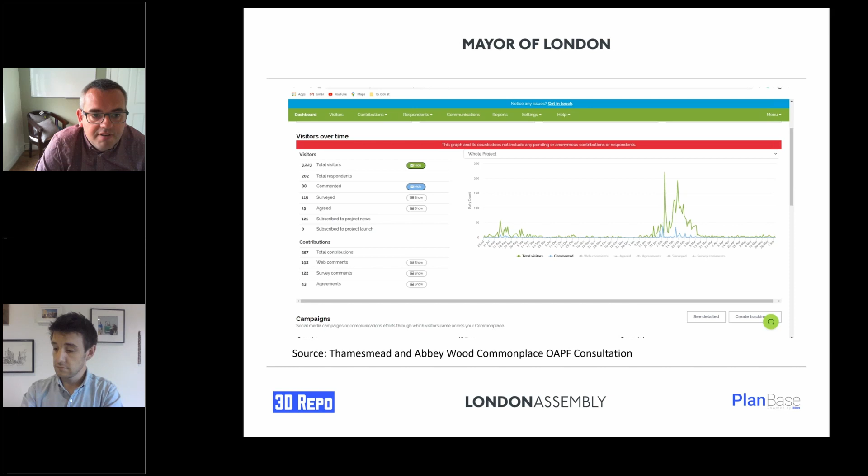Okay, so on to what 3D Repo is bringing to the table and what our goal was with this new kind of visual consultation. We wanted a new way to communicate the built environment and the community to the public. We felt that by displaying the proposals in 3D, we can help people get much needed context that they couldn't get in 2D drawings, as Peter mentioned earlier.

We also saw that consultations evolve from early stages through to final planning proposals, and they don't necessarily follow a linear A, B, C release path, and that maybe a digital platform could help release information and change things in the consultation and evolve it as it's going.

We wanted to complement existing remote, so web-based applications like Peter mentioned before, and also face-to-face tools and processes. We're not looking to completely wipe out other aspects of this existing process. We just want to slot in useful ways and embed ourselves into existing workflows. Of course, we want inclusive engagement, increased participation, and contextualized user feedback.

So it's not just that we want more. One of the problems with data is the more you get, the more you have to then deal with. So it's how do we contextualize that feedback so that the people making the decisions can really see what the public and the community think about the plans.

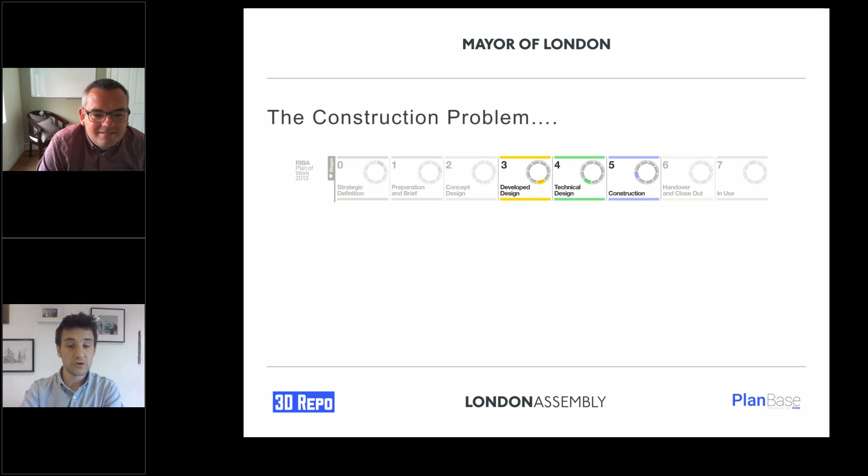So onto the construction problem. 3D Repo tends to exist in the RIBA stages 3 to 5 areas, so developed design through to construction. The reason we're there is because we've seen this rise of 3D models, often referred to as BIM, in construction, because the process of building has evolved beyond 2D drawings. Also the businesses involved in that construction process have evolved beyond just handling documents, and instead they're starting to handle large sets of data.

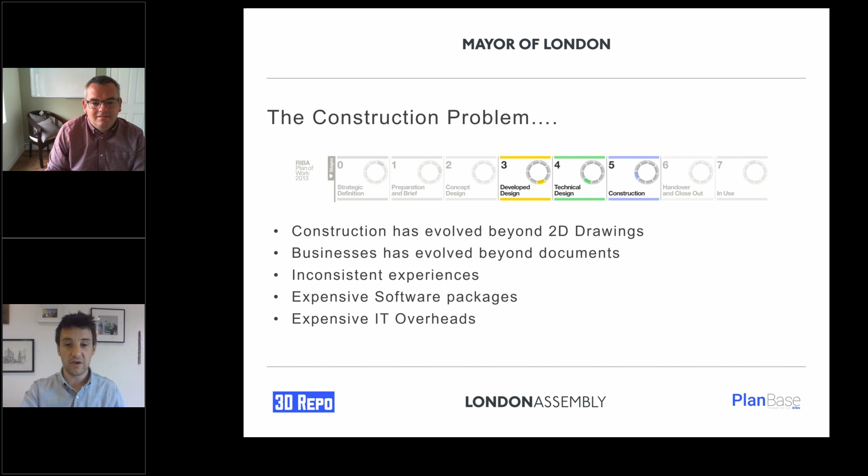And that was great, the 3D models helped solve that problem, but actually they brought with them other problems, which was multiple different softwares, file formats, and basically a frustrating experience for those that were involved in 3D models. And they had to use expensive software packages, and there was increased IT overheads.

So I want to dive into what exactly 3D Repo is and how it works, because I think that's going to contextualize what we've managed to do with Planbase in such a short period of time. First of all, 3D Repo is a 3D cloud collaboration platform. And what that means is it's a website that can display 3D models, in essence.

So you can send your colleague a hyperlink, and they can open up a 3D model, and you have confidence that what you sent them is what they're going to see. And the great thing is that if you create a new version of the model, all the people in your network will then see the latest version without having to go to your document management system and download the latest one.

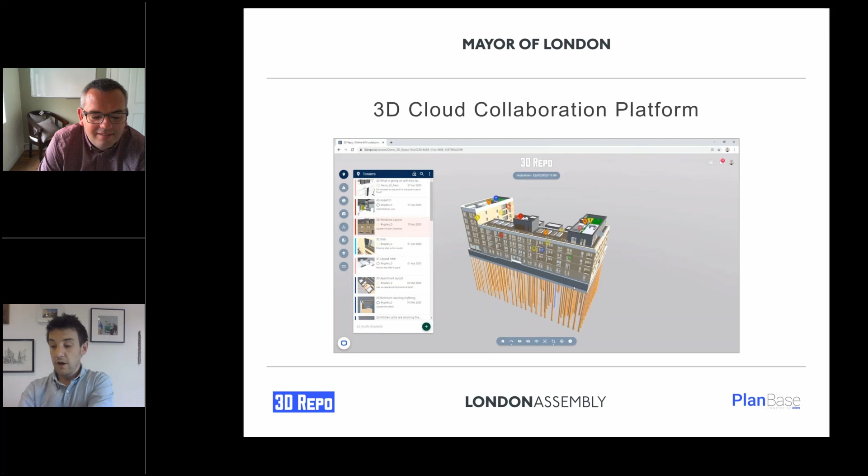Then from there, we started to think, okay, we've got this model management view, then what do we want to do with it? We want to start soliciting feedback from people in the industry and on the project. So people can look at models, architects can upload models, structural engineers can upload models, and they can start to see if they clash together, if they're going to have issues with construction. Schedulers can start to build what we call 4D animations of the construction process, so people could start to understand where their work fits in with the larger picture and if there's going to be any issues with logistics and things like that.

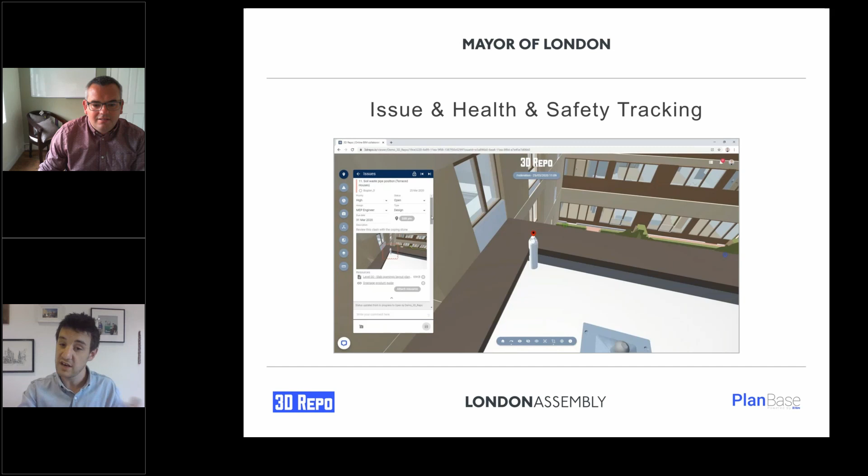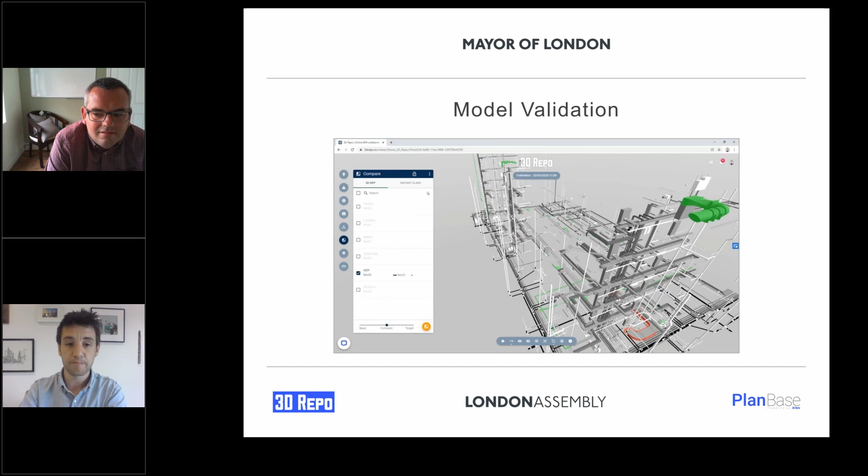So the back end of 3D Repo is a fully open source platform. What that means is we basically put our source code up on the internet for anyone to interrogate. That means there's complete transparency in the way that the platform works. And we also open ourselves up to integration using APIs, so other software systems that have nothing to do with 3D Repo can start to push and pull information in. We also have some state-of-the-art model compression and some patent pending viewing technology.

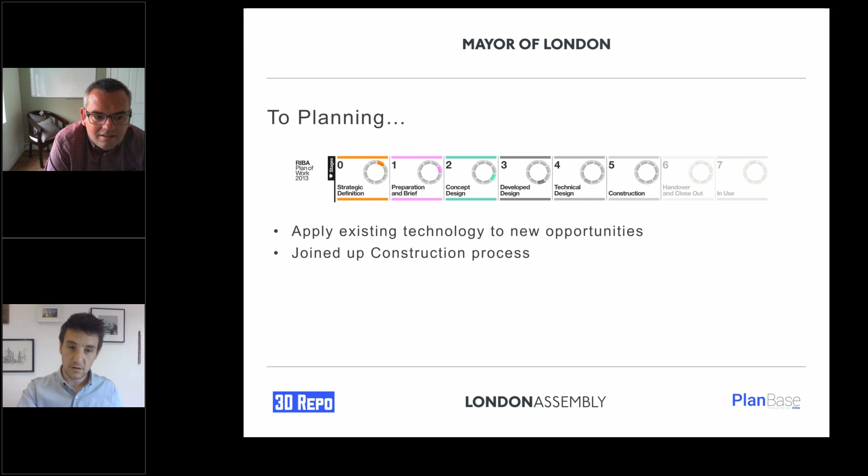So we decided when we saw the Civic Innovation Challenge, maybe let's see how we can move into this RIBA stage 0 to 2. We can apply our existing technology to these new opportunities, and join up the construction process so the work that's happening earlier on is not completely lost when we get to the construction phase. We were really interested in spreading the use of open source tools across the wider construction industry, and also exploring further uses of 3D as a communication tool. We don't think that the be all and end all of BIM and 3D is just in the construction phase.

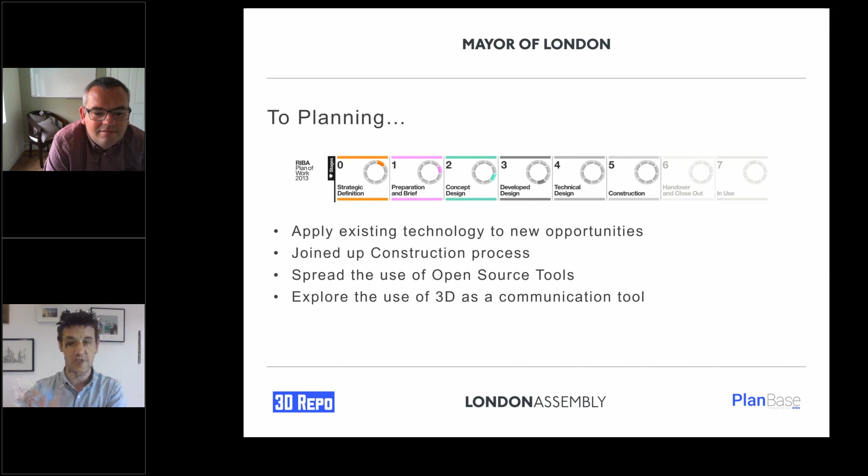So I'm going to go on to a demo. The first thing about the demo of Planbase, our new product, is that the models have been provided by a company called AccuCities who do some mapping. The key thing to say here is, as Peter pointed out from the timeline earlier...

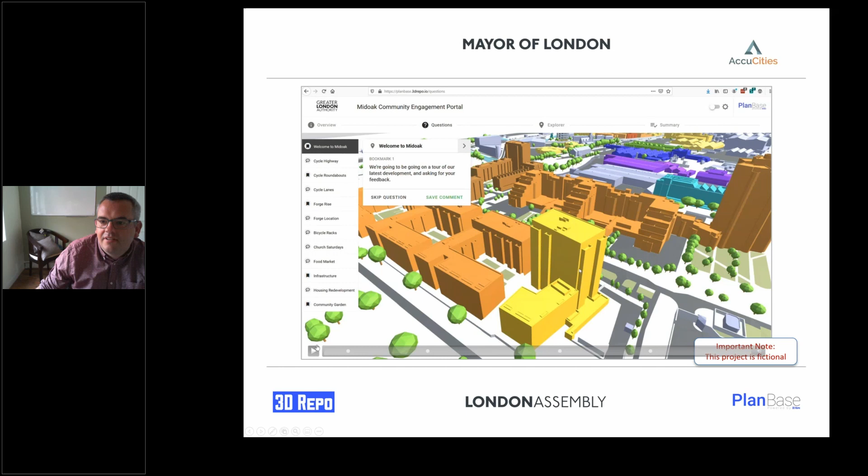As with all good tech projects, your internet's frozen you slightly. Are you still there, Matthew? Matthew? It's the critical moment where I can't take over. Hold on, Matthew, are you back? Hang on, can you hear me now? Yeah, I can hear you. Better? Perfect, go for it. Okay, I had to turn off my webcam, and I think it's because I'm about to play a video and it didn't like that.

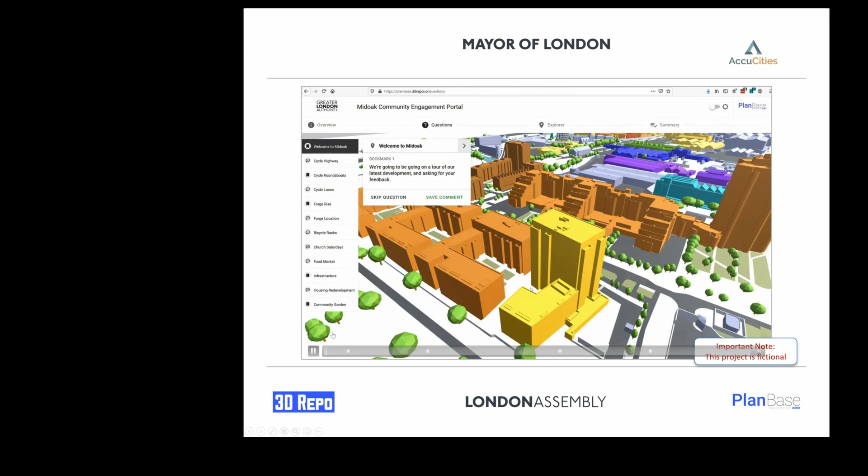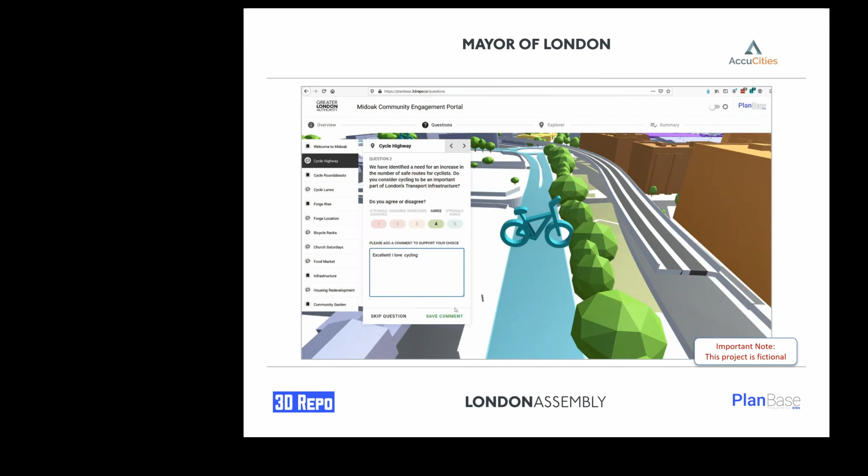So I want to run through a video of Planbase working. The main aim is we bring those 3D views into your browser, and from there we can start to ask the public questions, but with the context of the 3D model. So we can say, hey, do you like this bicycle path? And they can decide to leave a comment and rate it with a score, which you'll see me do here. The goal is that those comments now exist in a 3D world related to this bike path, so we've got some context when reviewing them. Then we can move on to the next question, still about the cycle highway, but giving people a broader understanding of where it's moving. That's the great thing about 3D—we can swap between these different contexts and give people additional information when they need it.

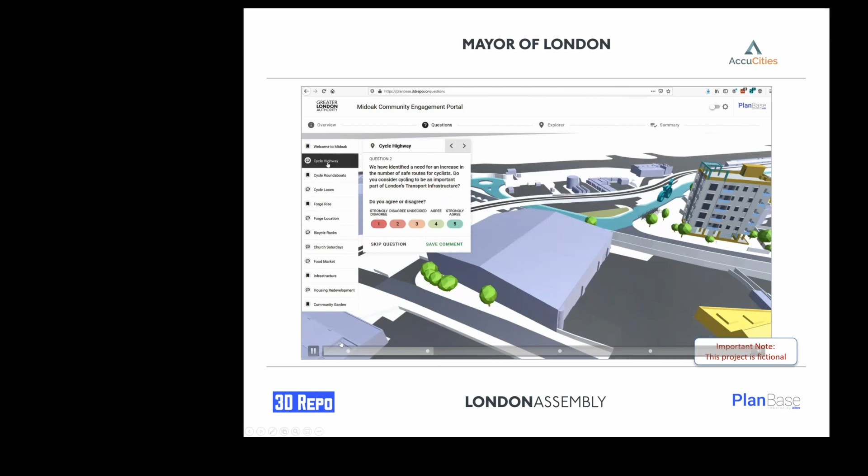Let's move on to the next one. The great thing about having these bookmarks and questions is that users can zip around the planning phase however they feel they want to. So if they're more interested in residential areas, they can skip to the residential bit, and we're constantly giving this narrative so the public can see what this consultation is about.

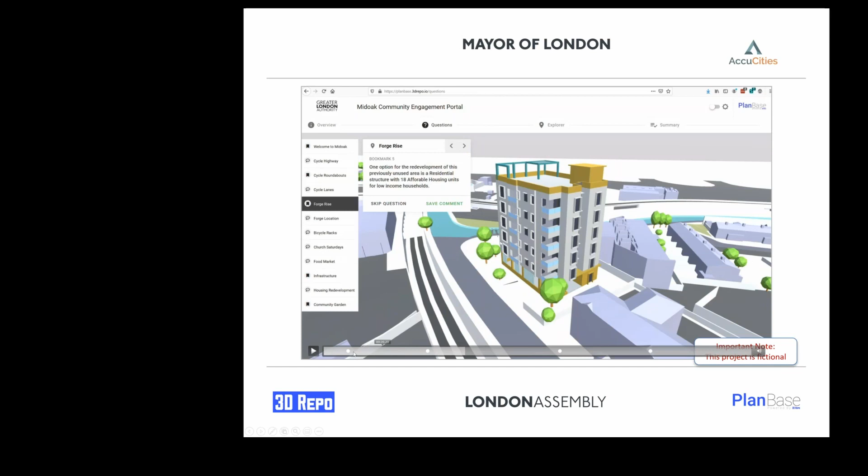The great thing there, we moved from the outside of the project, talking about affordable housing, and wanted to move in and say, okay, what is the experience like from inside the area? What can you see from the balcony? This is a typically industrial area. Is that compatible with the nature of the affordable housing?

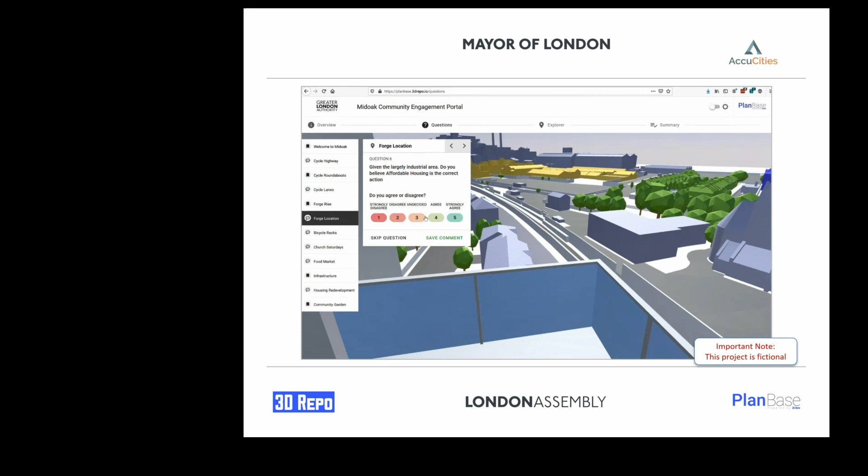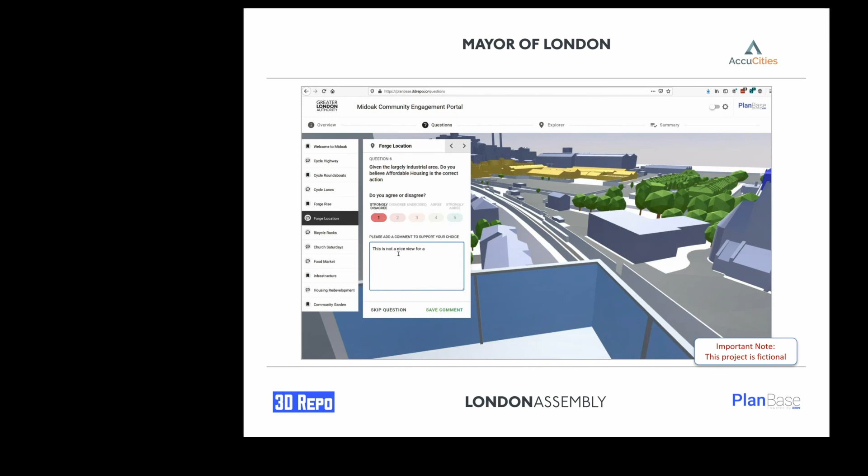And then we'll type this comment in, and then we can start to tie things together. So we spoke about the bicycle lanes earlier, so we can go ahead and talk to users about new bicycle racks that complement that new bicycle lane, and they can see where they are. We think it gives them that extra bit of context.

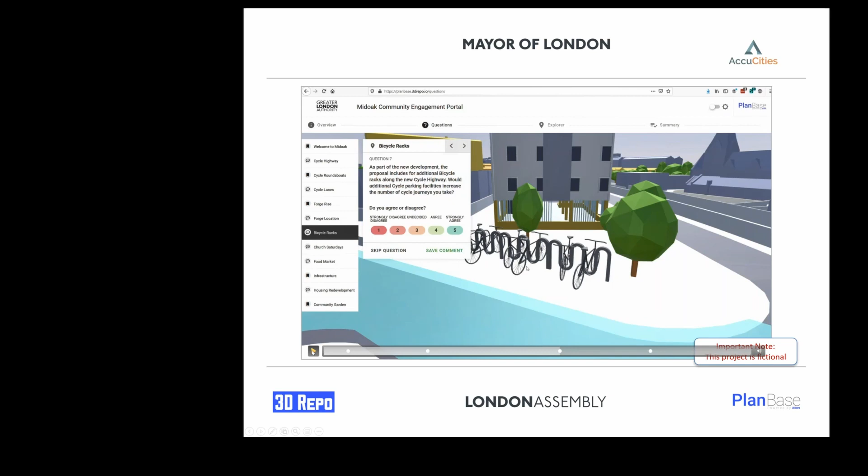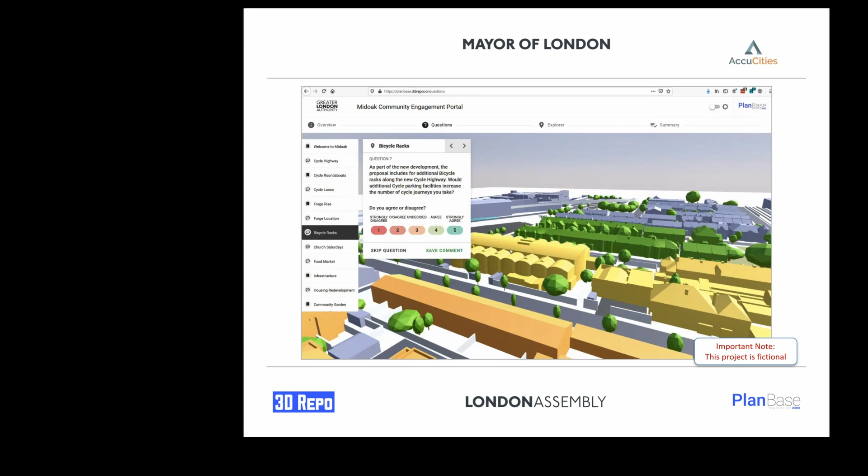The great thing about this is now, because we've got this living 3D model in our browser, what if the user is getting a bit tired of our standard narrative views and wants to peel off and see the view for themselves? They can zoom out, look at the neighborhood as a whole, go over to their house if they want and say, okay, what does it look like from my house? What are these views like? How is my life going to change because of these plans?

And then we can start to visualize social and community gatherings as well. So in this instance, we're saying, what about a new food market that might open up? And we can get people's feedback on that.

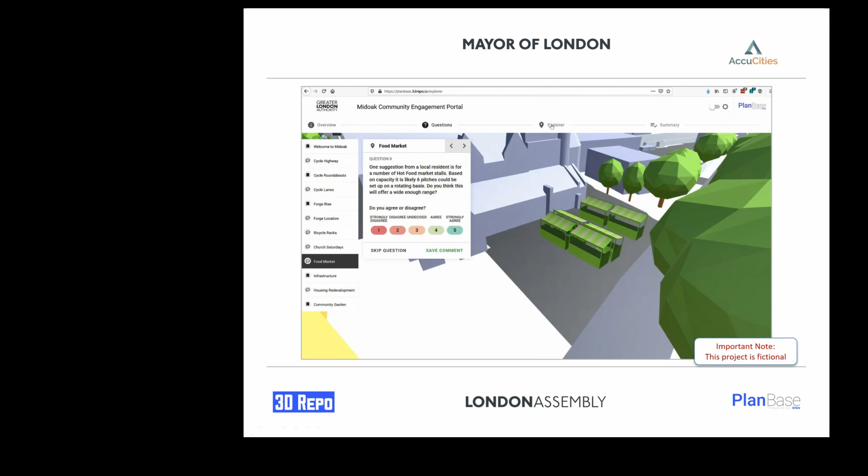The next stage we were looking at is, that's great for the guided narrative process, and we think that's a really powerful tool. But what happens if we want to let people freely navigate and lay pins anywhere in the 3D world and start to comment so they can leave additional information about the way they're interacting with the community? We gather all those things up and let people see each other's comments and vote on them.

So then on to my final slide. I should point out there's a disclaimer in the corner here. This is a fictional project, and we're just using it to illustrate the process at the moment.

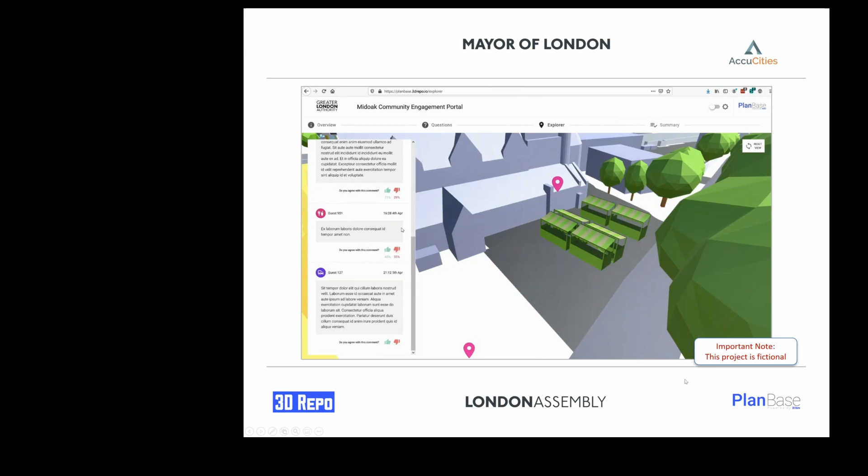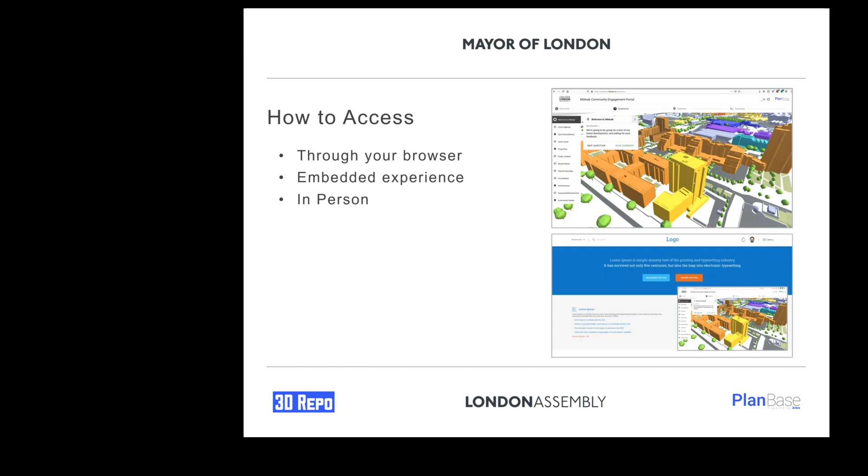So how can you access PlanBase, or how will you be able to access it? You can access it through the browser in the same way we do with 3D Repo. We can embed PlanBase into existing planning experiences. And then also, using our partners with Mission Room, we can set up environments in community centers where we can project PlanBase onto a screen and really encourage people to come up and point at the screen, so even those less technically savvy can still get involved and don't feel left out.

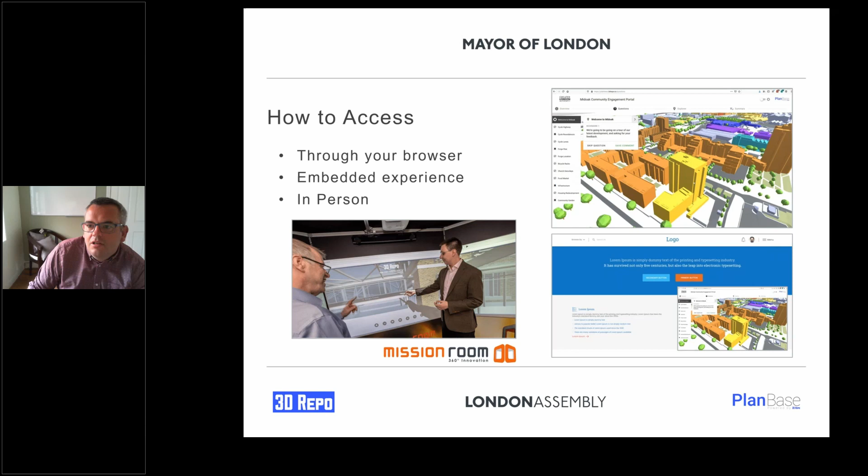Hold on, if you stop sharing your screen, you'll be able to see me again and switch your camera back on. Hang on.

I'm always so pleased when other people's tech presentations struggle. So thank you for that.